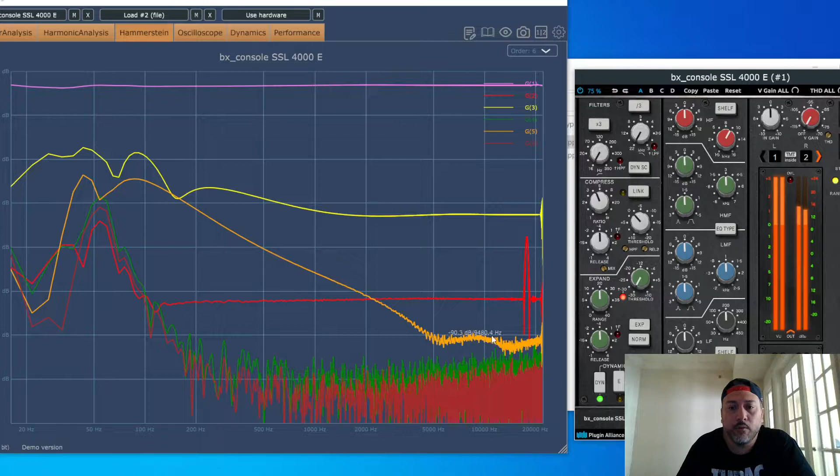Looks like a fourth order harmonic. Oh, that's where your noise is though too. So if we could turn that off, we could see what it's doing. Let's turn it off. Well, we just turned it down. So there's a little bit going on this fifth order harmonic. So you get a little bit of that odd harmonics, and you're getting some even harmonics. It's a little blend of both.

It's not bad. I mean, is that characteristic to the real console? I have no idea. I mean, it sure sounds like it when you're mixing with it. It sounds like the real thing. So, is this snake oil? I don't think so.

So let me turn the threshold and the compressor off here like this. Oh yeah, we gotta turn the gate off. So yeah, we looked at that. Let's take a look at the filters. Okay, so the filters are usually automatically engaged. So if the filter's already automatically engaged, it looks like it's basically getting rid of anything below 10, which is nice. That's a nice thing to have. And then you got a little bit of top end stuff going on here.

So let's take a look at it with everything engaged. Now the compressor is off. So with everything engaged, now you get a better look at the harmonics. There's a little bit more going on the top and the low end. And then the Hammerstein is kind of reflecting that here too. So it's very interesting. Yeah, I'll just hit pre-dynamics. That's just changing the order of things.

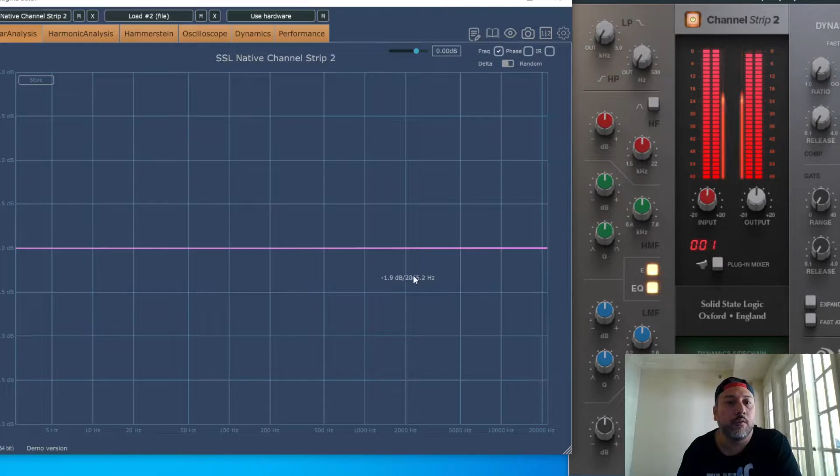So we could turn the filters off and then look at it that way. Say, okay, filters off. Now there's nothing. There isn't shit. It's clean as fuck. There's nothing going on. So there you go. There's your harmonics. They say, oh, it sounds analog. There's no fucking harmonics, bro. Nothing going on there. Alright, so I gotta go back over the other ones now real quick.

So we want to make sure the filters are disengaged. So I want to go back to the Brainworx. I'm going to do it real quick. Turn off the gate. Turn these off. Okay, but it's still doing something, as you can see here. And we'll go, yeah, okay, so that's off. Go harmonics. That's because of that low end roll off, but otherwise there's really apparently nothing going on.

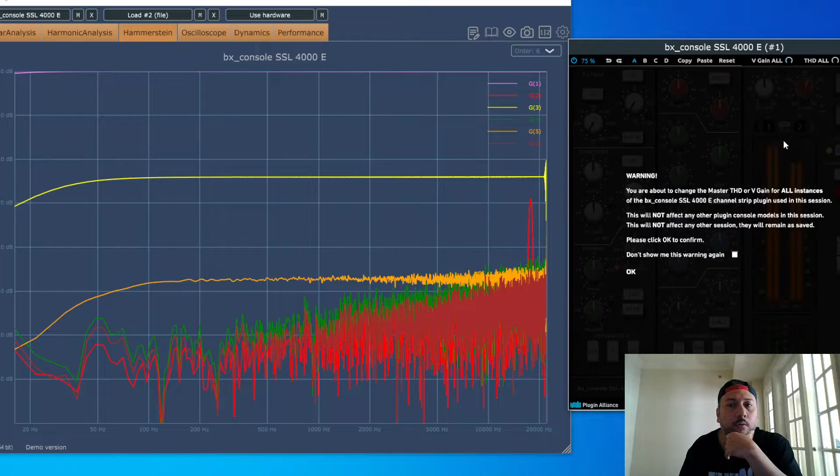Hammerstein. Well, that's not necessarily true. I see it under the Hammerstein. So we have that roll off, but you see that there is harmonics here. Well, there's noise. There's noise, of course, but there's harmonics. Well, what if I turn V gain all the way off? Okay, damn it. Oh, let's do it here. We just made it quieter, but...

So, I think that you're still getting a 4th order, 6th order, and 2nd order harmonic on the low end. I mean, God, that's noise, though. And I mean, there's a little bit going on the top, which you weren't getting out of the SSL channel. Nothing was going on when the filters were turned off. So, I mean, you're getting something. Yeah. Okay.

Let's take a look at the Waves. The E channel is pretty clean, but there is something there. So it's not like you're not getting anything. And that was the whole point of people mixing on SSLs in the past, is because they were supposed to be very clean sounding. But they give you a little bit of harmonics. That's what we want. With that little bit, it goes a long way.

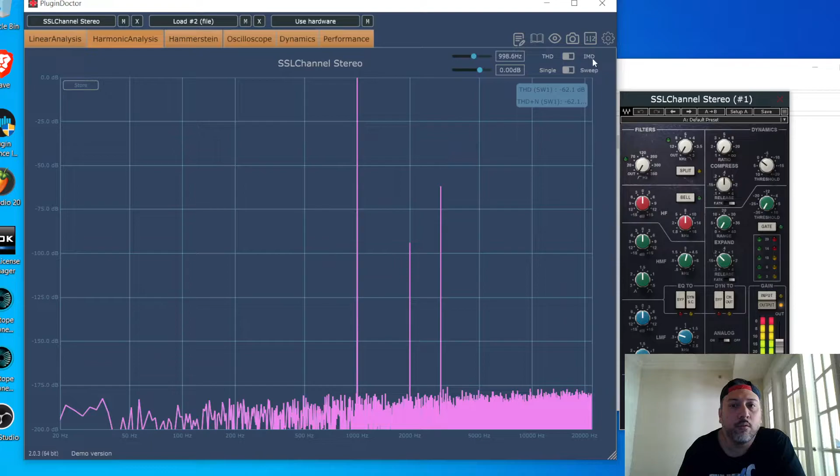Alright, so we don't have filters engaged here. So, I believe everything's turned off. Alright, so this is pretty much, there isn't shit going on here. No harmonics, dude. Take a look at the Hammerstein. Okay, so there is a little bit. Right here. Very high 3rd order harmonic. Pretty high 2nd order harmonic. And a little bit on the bottom. You are getting something. Way down at 20, there's a little bit of harmonics. 4th, 6th order harmonic and a 5th order harmonic, low end on the Hammerstein analysis.

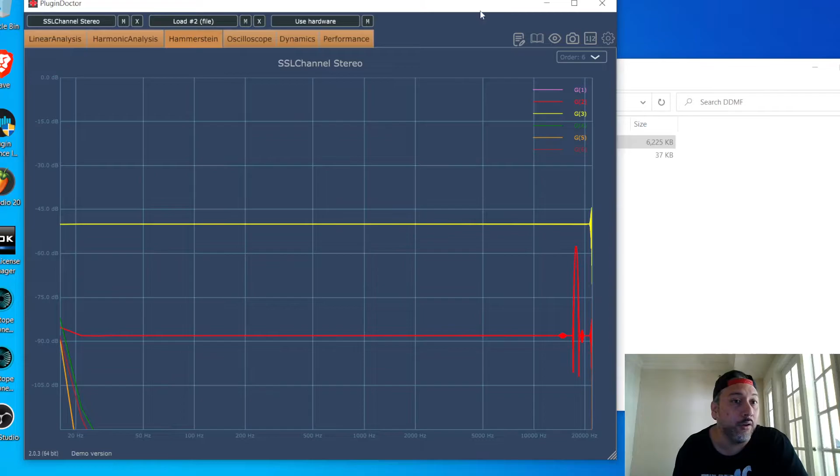So you're getting something out of the Waves, but you are not getting shit out of SSL Native. That thing is a flat digital plugin, dude. Straight up, you're just getting the curves and the compressor, but you're not getting any vibe out of that. No harmonics. That thing is harmonic free. You go, well, it's a 9000, bruh. Alright, so let's check it with the 9000J from Brainworx.

This one, I've been told, sounds almost 99.9% exactly like the real console. They go, you could mix on this plugin and no one would know the difference between that or actually sitting at the desk. It's that damn good. Okay? So here's this one under the microscope. And we don't have filters engaged. We don't have nothing engaged. We'll turn off the dynamics. Alright, so I turn off the dynamics. There's your EQ curve. Flat as shit.

Alright, we can take a quick look at what the EQ does. It's obviously G stuff, just like SSL Native was showing. You're getting tolerances though because it's a desk. It's a console being emulated. Okay, very good. Harmonics analysis. This thing looks like it's not supposed to give you any harmonics, but a console is going to give you a little bit. But not this bad boy. You're not getting shit. At least not on that. Let's check the Hammerstein.

Oh, but I was wrong. Well, it looks like it's just noise, right? Let's turn that shit off. You're getting harmonics out of the noise, I guess. I think that's what I'm reading here. The noise is creating harmonics. Otherwise, if there was no noise, this shit would be exactly the same as SSL Native. Wow, that's interesting to me. But SSL Native gives you nothing, man. There's no fucking noise. There's absolutely nothing at all.

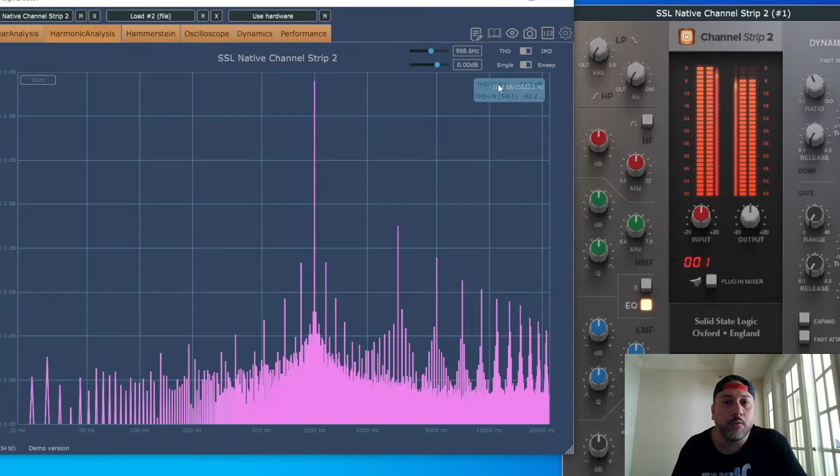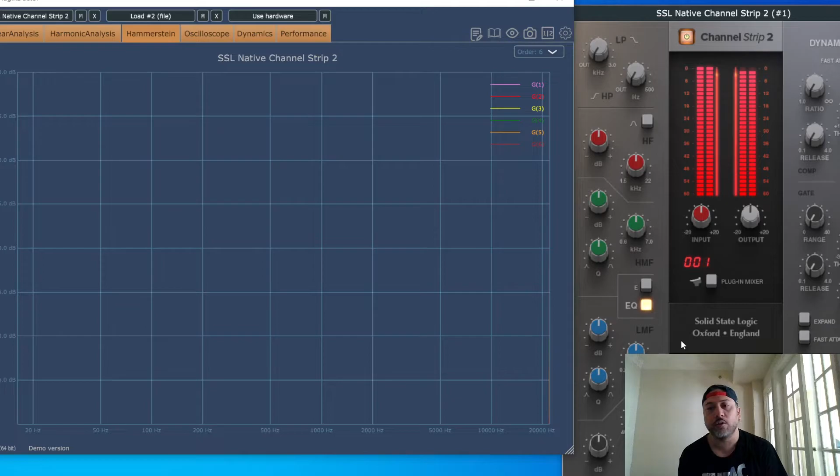God, there's harmonics going on. Oops, that's the compressor, guys. Turn that off. All right. So once again, harmonics free. Check the Hammerstein. Look at that. Now that's what no harmonics looks like. But then there's also no noise. So, you know, you got to wonder if you turned the noise all the way off, if there was any kind of harmonic still being generated. But from what I see, there isn't jack shit.

Oh wait, a tiny itty bitty line way up here at about like 22K looks like a 6th order harmonic slightly, but pretty much there isn't shit. This thing is as clean as a fucking... it's clean as a hospital surgical instrument of some kind, you know, like just crazy.

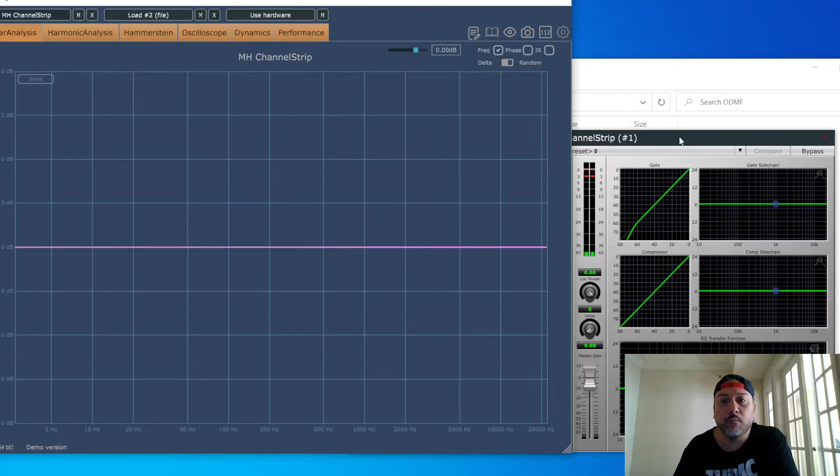I know, but there's another one, the Metric Halo channel strip. We know this thing is clean, right? We know there isn't shit going on in this thing. And this is the infamous channel strip of Serban Ghenea, right? So let's see, why does he like it so much, man? Doesn't seem like it's doing anything. All right, so when you hit the first band, oh, that's a filter, so we keep that off. Yeah, what does he like about this so much? I don't understand. So you have a bell on the top, no shelf. So there's no shelves. It's all bell curves. That's another interesting thing to pay attention to.

Yeah, all bells. Oh, but it's so SSL-like. Yeah, but you get no shelves, you just get bells. Oh, maybe you could switch these. Maybe you could switch them. Here's your low frequency. Yeah, I bet you could switch them to a shelf. Let me see. Yeah, there we go. Okay. And it's like an E-channel shelf. So that's interesting to know.

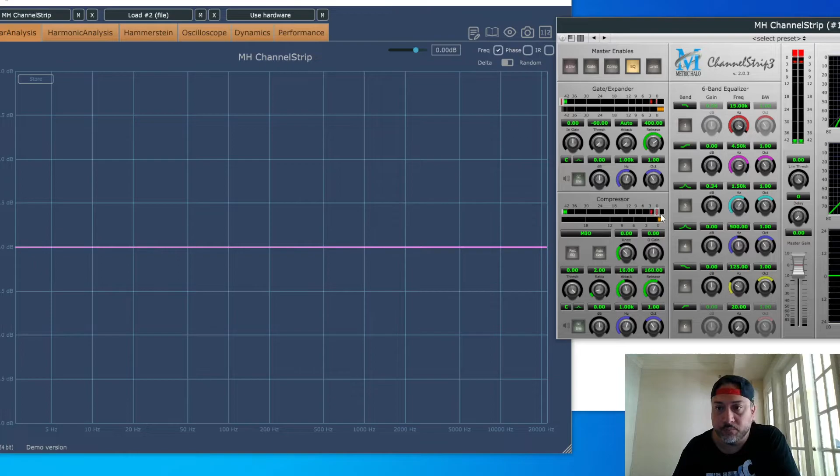There's your low shelf there. Okay, you got everything. That's SSL-like. That compressor needs to be not doing anything. So, harmonics, it looks like there isn't shit going on here, which is predictable. This is supposed to be a flat digital plugin. And you're getting nothing as we can see there. And on the Hammerstein, you're getting nothing there. It's exactly the same as SSL Native. So there you go. SSL Native versus Metric Halo Channel Strip 3.

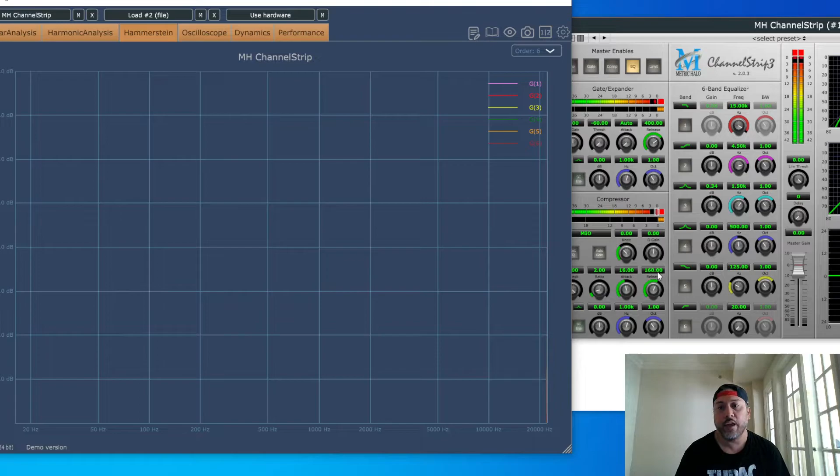It's the same shit. The only difference is that the curves look like E series curves as opposed to G curves. So on the SSL Native, you're getting G curves. On the Metric Halo, you're getting SSL-like E curves. So yeah, it's like a super clean version of the SSL E channel is what Metric Halo is. But you also get a limiter, which is a cool little addition to everything.

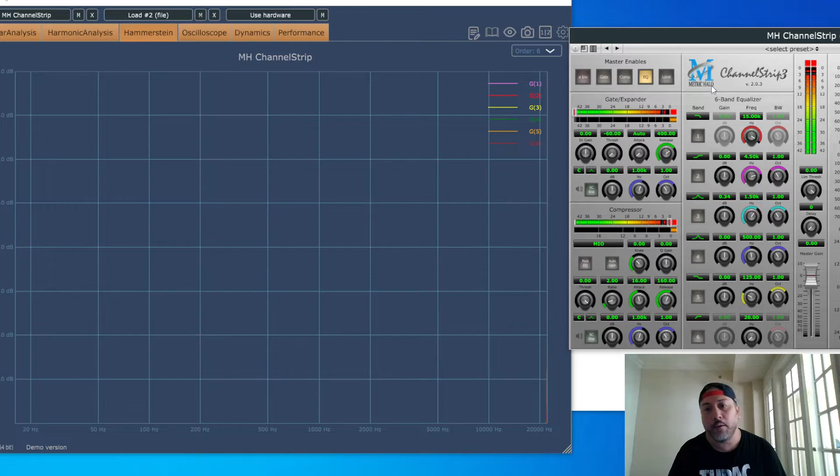And I imagine that when the compressor's engaged, you're going to get harmonics then, right? So we'll just bring it down a little bit. And no, apparently not. No, I'm wrong. Now you're getting harmonics. Once you engage the compressor, you're getting harmonics. And it looks like here you're getting third order, fifth order harmonics. Looks like odd harmonics mostly. And then on the bottom end, you're getting some even harmonics. So even harmonics on the bass, odd harmonics on everything else.

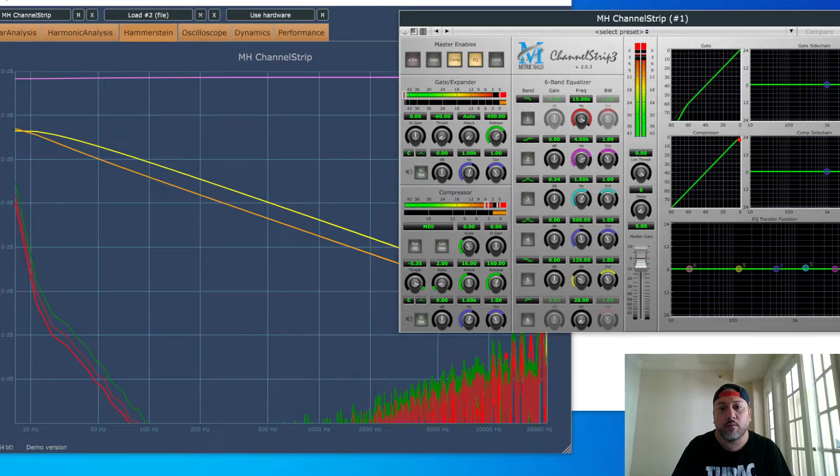Interesting. That's something really valuable to know when you're using the compressor. You're getting some of that kind of character out of it. I find that odd harmonics don't necessarily sound very good. So that's probably why they EQ after the compressor on the channel strip, because it's just going to generate more of those harmonics that you probably don't want to hear.

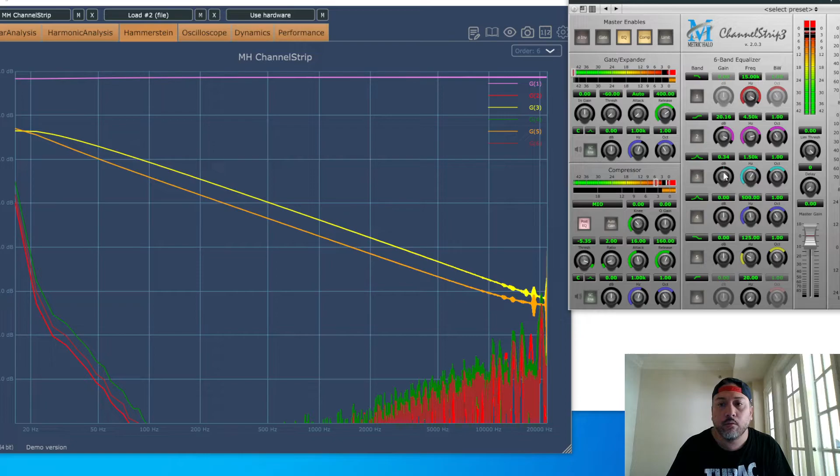So, like if I were to put this post EQ and then just do an EQ move here, does that change anything? Because I'm EQing into this, right? No, apparently not. Doesn't change anything. But this is an interesting thing to analyze your plugins with. Now Paul Third, you're my buddy and all, but you were hard on the AMEK, dude. Let's take a look at this. You said that this thing was just the same as the Metric Halo channel strip. So let's take a quick gander at it.

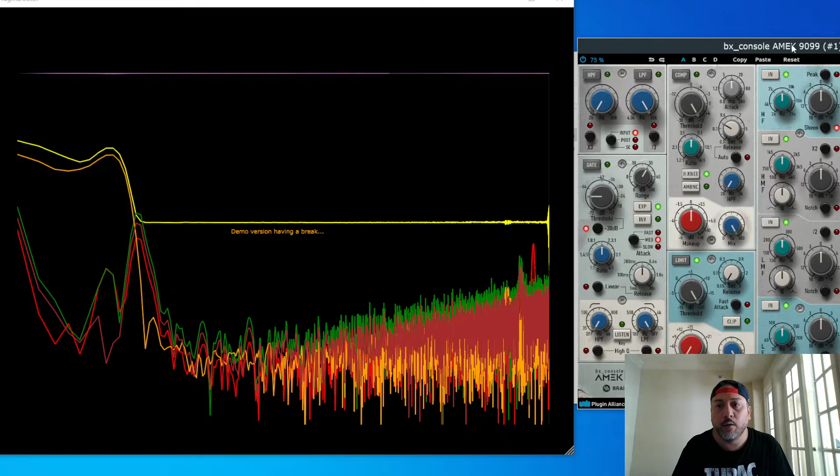I don't know why he would say that you might as well be using Metric Halo. You're getting harmonics out of this. Yeah, but you get those harmonics out of the Metric Halo when you engage the compressor. So maybe that's what he means by that. But otherwise, you are getting the harmonics. We can clearly see that plain as day. So either I'm looking at this wrong or... no, the AMEK is giving you harmonics. Now, that's good for people to know.

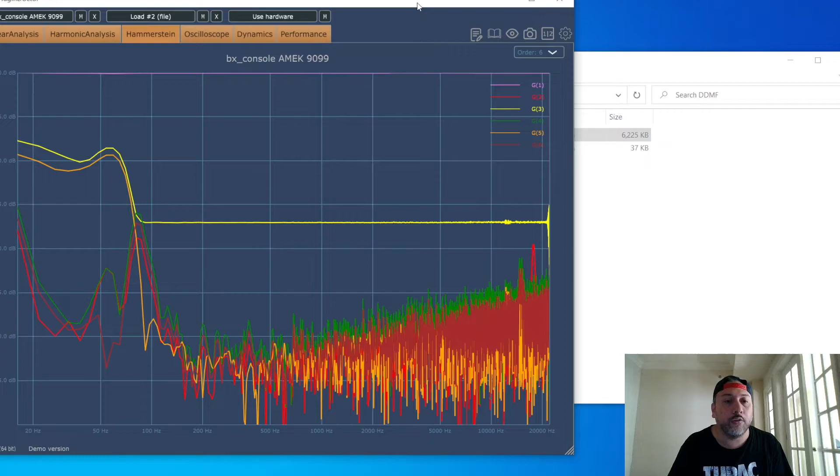I'll do that as a matter of fact. I'll take note. So, it's interesting, the AMEK is legit.

Alright, how much time do we have here? I said I would do this for an hour, so we'll do another 11 minutes. Let's look at another one.

The Focusrite console, I'm just going to tell you ahead of time, it's got harmonics. You ain't got to worry about that. We know the Neve. Hey, this is the Neve VXS, man. This is a bad boy here. This thing makes everything super warm. And there's a reason why, man. This thing is loaded with harmonics.

This thing is just rich with harmonics. I think it is. Maybe I'm wrong. God, that looks flat to me. Okay, so maybe there isn't shit. Oh my god. Oh no, okay, there is. There's a third order harmonic here. And a little bit of a second order harmonic.

There's a lot of fucking noise, man. Can we turn that off? Just turns it down once again. Doesn't completely get rid of it. We can see that there's a fifth order harmonic here. And you got a little bit of harmonics on the low end. So that's what I thought I was hearing.

Yeah, so there's harmonics in this thing. Definitely. It's not just clean as a whistle. Although right here you would think it is. But no, there's harmonics. You're good to go. I'm trying to think of any other plugin I might be able to run through this thing here. We did say the 9000J, you were getting something out of that, if I remember correctly.

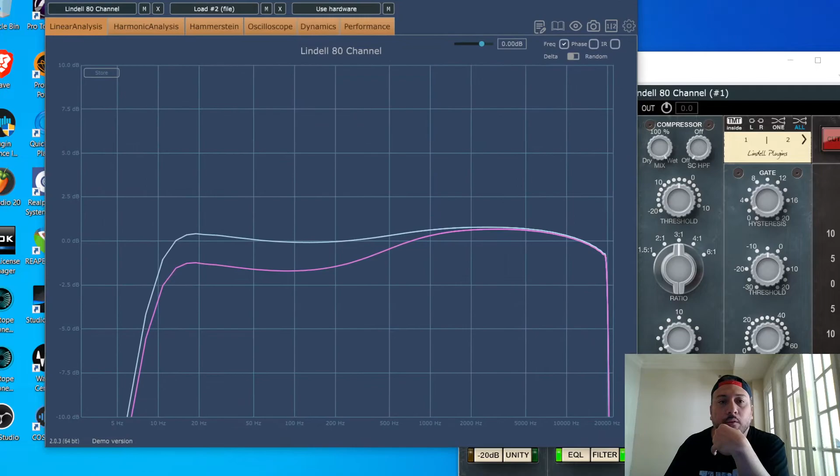Well, we go look at the Lindell. I think that's been analyzed before. Let's analyze it the way we've been doing it. So, let's kill all this, turn the compressor off. Any gates or anything, keep those off. So you get some vibe right off the bat from this thing. The filters are turned off. This is just automatically what it gives you. So, I guess that's characteristic to a Neve console, an old one.

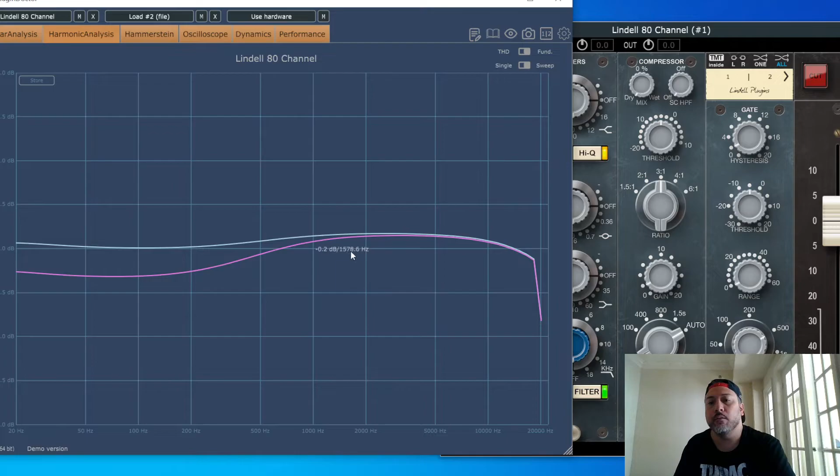So let's go with harmonics analysis. Looks like you're getting harmonics right off the gate. Oh my god, you're getting a shit ton. Look at that. Especially on the high mids and stuff. Hammerstein analysis. Dude, this thing is generating tons of harmonics, man. It's wonderful. No wonder why it sounds so fucking good, man.

Look at this, man. This Neve is one badass plugin, man. That's all I know. You want shit to sound beautiful? You gotta have this. It sounds great, man. Look at all that harmonics it generates. It's fucking great. But then here's the thing, right? So, to conclude our findings, take a look at my time.

Alright. You would expect an SSL channel to be clean, but generate a little harmonics because that's how an SSL was supposed to be if you're trying to recreate the console. So that's a nice thing to know, that they do give you a little bit on most of them. The SSL native channel is super clean. It does not sound analog. It just does not. You engage the compressor, you're getting a little bit of harmonics there.

The Metric Halo channel strip is the same thing. We know that the SSL native gives you E and G curves. We know that the Metric Halo basically has SSL E curves in it. Okay. We know that the AMEK actually does have harmonics. So saying that it does not is not true. Then we know that the Lindell 80 is just an unbelievable rich amount of harmonics.

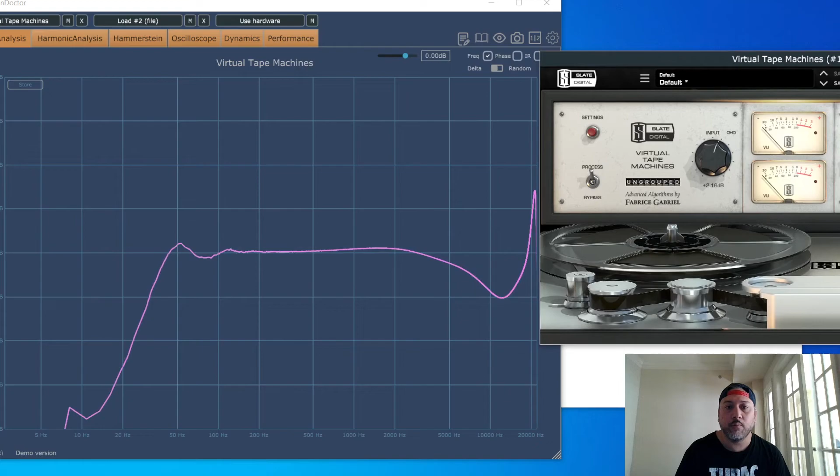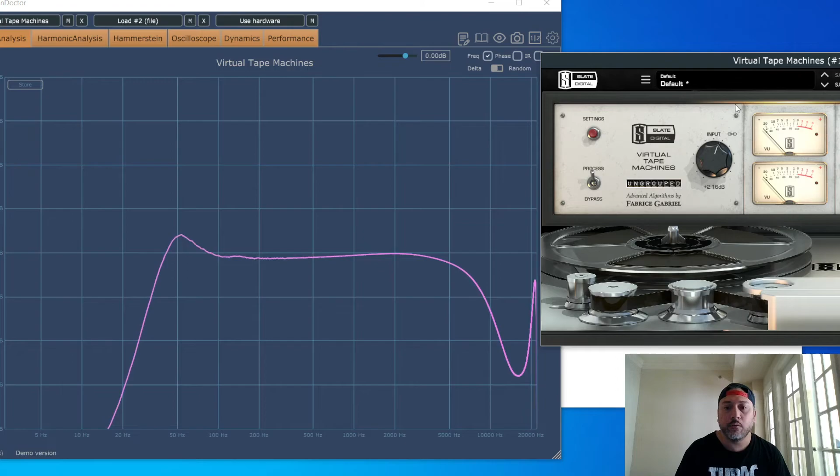So if you change the tape, you got different characteristics. This is the Quantegy GP9 tape. That's cool. And then this is the Quantegy 456. So it gives you some low end bump, and a dip in the highs, and then it kind of comes back up. That's kind of interesting. When you change it to half-inch 2-track, it's not pulling those things down so much. It's giving it a little bit more character there. The GP9, pretty similar. Okay, so that's cool to know, right? The IPS speed affects things.

Wow, look at all the different characteristics you're getting out of this tape machine. That's fucking crazy. Alright, so here's what we wanted to see. Harmonics. Well, it looks like you're getting plenty. You're getting a shit ton of harmonics in here.

Guys, this is on the very edge of the screen, so you're probably not even seeing this. Let me put this over here. I apologize if you watched the video while I've been doing this and you guys are not seeing anything.

Okay, so yeah. Oh, and that's interesting as it's going. It's kind of changing a little. Check the Hammerstein. Oh, dude. Harmonics galore. Harmonics fucking galore. So there you go. This is a Slate Virtual Tape Machine. Oh god, I'm on 15 IPS. Let me switch it to 30. It should change the character just a little bit.

So if you're using like the Waves SSL and you don't feel like you're getting enough harmonics, man, everything went to the tape machine back then. Put it on a tape machine, that shit should sound realistic. There you go. And it's up to you how you want to do it. I like the workflow of the Brainworx. That's where I use it more.

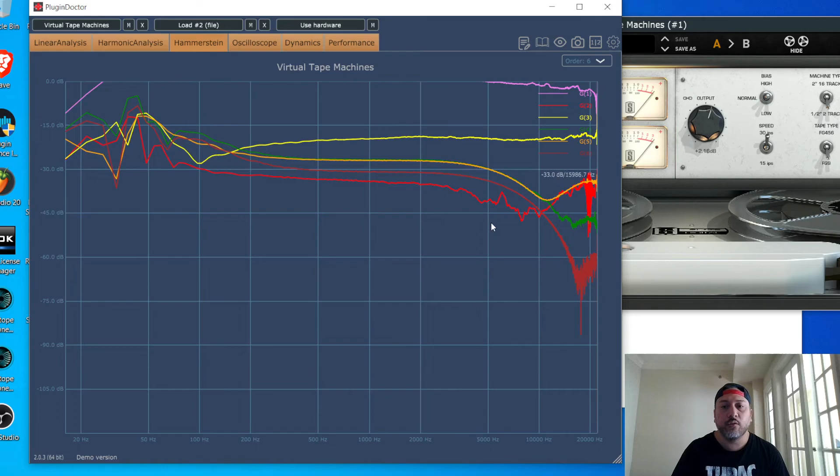Well, the vibe is going to be similar. It's going to sound similar, so basically the whole album is going to sound similar. So that's going to be a nice thing. I'd have to know whether or not they're using tape machines. If they're using the tape machine, then yeah. I think there's another difference though, like using the bus compressors and stuff too. They add something to it. Oh god, we got to look at that now.

All right, let's check. Okay, we're gonna be super fast. I want to look at the bus compressors. Here's the Townhouse bus compressor. I always use this with the Brainworx ones. We'll just leave it default. Let's just check the harmonics. Actually, no. What did I just do? Did I just delete that? Give me a second. Alright. I gotta know, dude. I gotta know. Alright. This is how I have it set up.

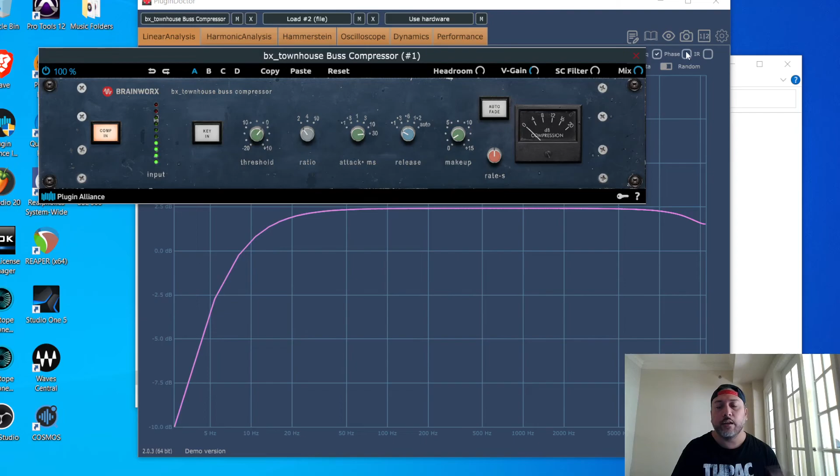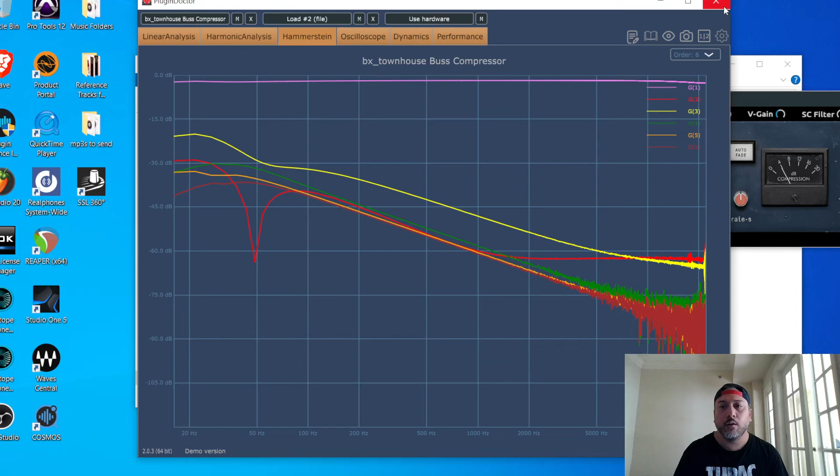We put some threshold on that. That's how I do it when I'm using this. Alright, let's take a look. That's cool to add some character right off the bat. Harmonics, we can see there's clearly something going on here. Alright, bus compressors adding harmonics. Lots of it. Beautiful. The bus compressor is part of the sound. It's on the center section of the SSL console. So if you're trying to have the SSL vibe, you gotta have your bus compressor. So okay, we know it's doing that. Very good. Passes my test.

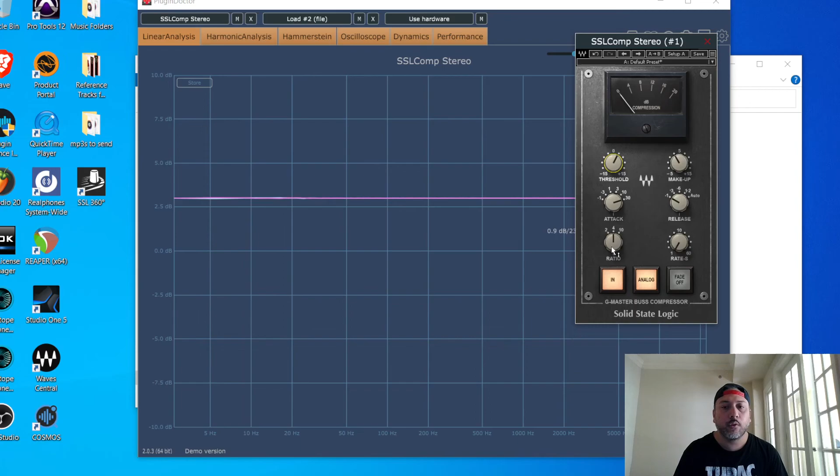Let's take a look now at the Waves one. I gotta go back to the VST3 here. Yeah, the bus compressor. We gotta turn analog on. That's gotta be there. Let's give it some threshold. 2 ratio. Check the harmonics. Looks like there is some. Oh, look at that curve. Okay. Yeah, you're getting harmonics, man. Excellent.

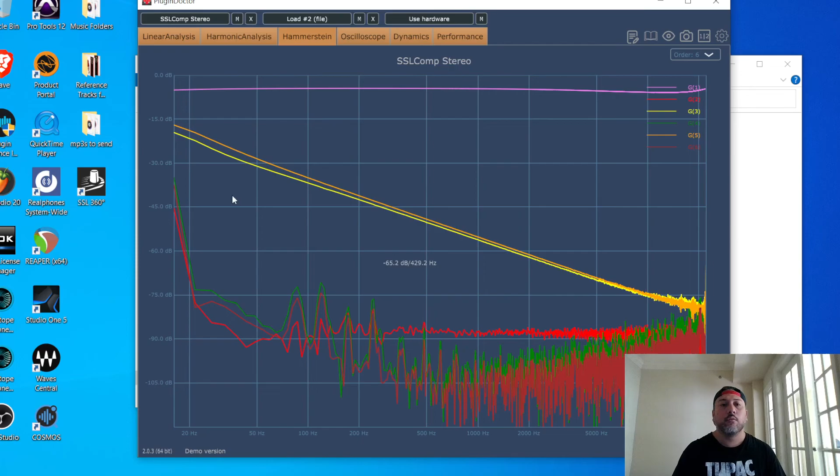So that's what you would do. You'd slap your SSL channels across your whole session. It's pretty clean until you start engaging the compressor, and then you're getting some harmonics. And then, of course, the bus compressor is giving you more harmonics. So, one more for the road, guys, because I want to make sure that I went to the G channel. Oh wow. No, I want to go to the E channel. Sorry, my bad.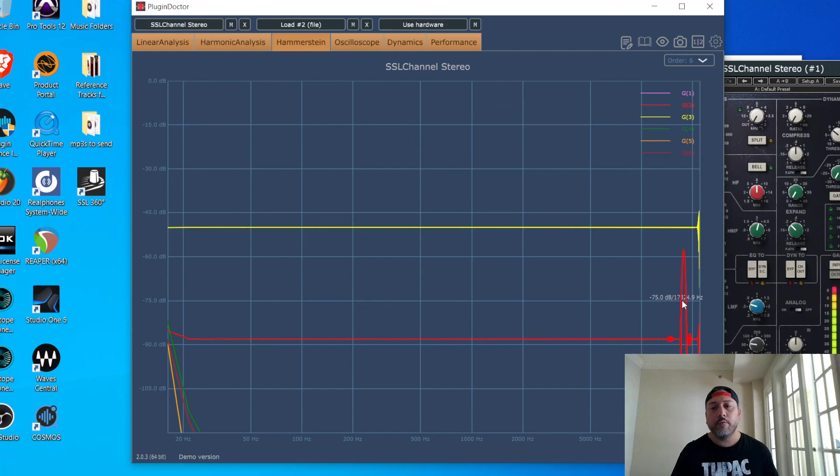So, compressor's off. Okay, I want to check that harmonics one more time. Give me a sweep. Looks flat. Give me the Hammerstein. Okay, so yeah, you have harmonics out of the SSL channel just by not even doing anything. I don't even have analog turned on. I turn that on, you get the noise, right? So you get more of that cool stuff going on. So they're both legit. It's whatever you want to use.